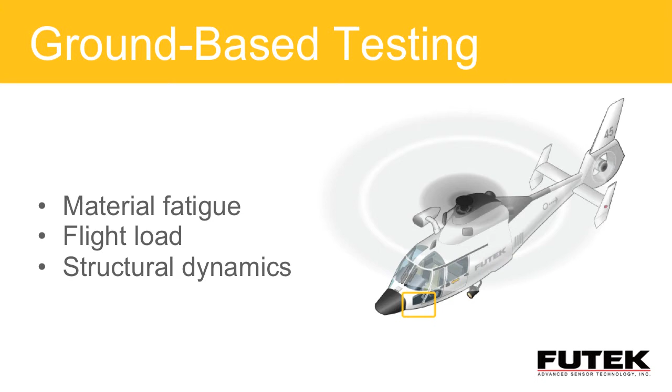These are typical of what I refer to as ground-based testing, and many of you out there probably are already involved in that. Component testing is a big one for aircraft hydraulics and other components used on the vehicles.

For both the test and measurement ground-based testing environment and the flight qualified environment, there are some significant aspects that factor in. Reliability is extremely important for any of these tests. Usually it's a significantly long test with tremendous expense associated with data collection, so high reliability is extremely important.

Endurance at the same time. We've got to have sensors that are going to continue to work over possibly millions and millions of cycles, and so we also focus on high endurance for any of our sensors associated with aerospace testing.

Multiple bridges, that's something we're involved with on a regular basis. For most of the aerospace applications, we are going to use a bridge for control and a bridge for measurement. That's something unique to aerospace, but we're aware of that, and we offer the capability for most of our sensors to be built with dual bridge capabilities for that control measurement requirement.

And then last but not least, of course, great performance. That's the other thing that's unique to aerospace. When you look at the breakdown of specifications, in the commercial world, we'll talk about accuracy and the components of accuracy being nonlinearity, hysteresis, repeatability. And then we handle the temperature errors as a separate entity.

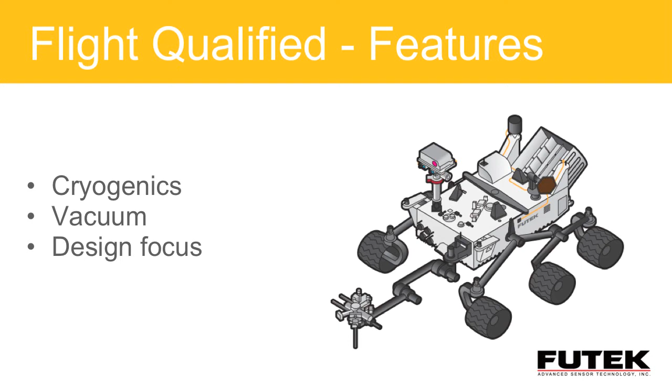What you're looking at here is one of our more exciting projects in the last few years, the Mars Rover. We've got a multi-component solution on the current rover looking at both force and torque in the sampling process that's used. As you can imagine, it's a very extreme environment, and we were very successful at providing a viable solution with a very intimate partnership with the end user.

Back to multiple bridges - in many cases we're dealing with a bridge for control and a bridge for measurement, so we try to maintain that capability across the product line. There are trade-offs between size and multi-bridge. In many cases you have to get very creative with spacing to accommodate the additional strain gauges we'll use to do that.

Vibration, fatigue, and overload - again, environmental considerations we have to look at. In many flight qualified sensors we're going to see extreme vibration environments, extreme cycles, possible overloads. For overload capability, because we use EDM, we're able to offer that capability, which a lot of manufacturers don't have. As far as vibration, we have a number of things we can do - additional coatings, how we wire internally to secure our wires and strain gauges - to accommodate those high vibration applications.

So in making an assessment for a potential supplier for a flight qualified solution, it's very important to find out what kind of history they have. Have they done other projects similar to yours? Do they have the expertise to address issues of cryogenics, high shock, high vibration, multiple bridges, and those kinds of things? We've got a list of references and programs we can bring to the table.

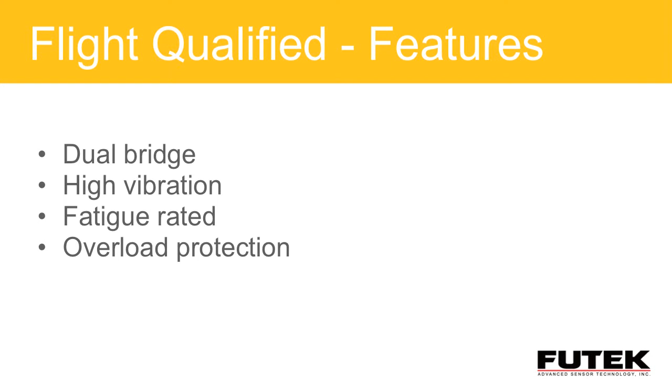And show our client or a prospective client the programs we've been involved with - the clientele, be it NASA, Raytheon, Lockheed, that we have partnered up with their technical team. So we have quite an extensive legacy in providing custom, complex solutions to address these aerospace applications.

As we begin our discussion on products and applications, I wanted to take a moment to introduce three flagship items that are only a small sample of our overall product line: the LTH through-hole series, which has been very instrumental as a base platform for many aerospace applications; the LCM, the rod end series, very common for structural testing environments; and the LAU family, commonly used for pedal force measurement in both commercial and aerospace applications.

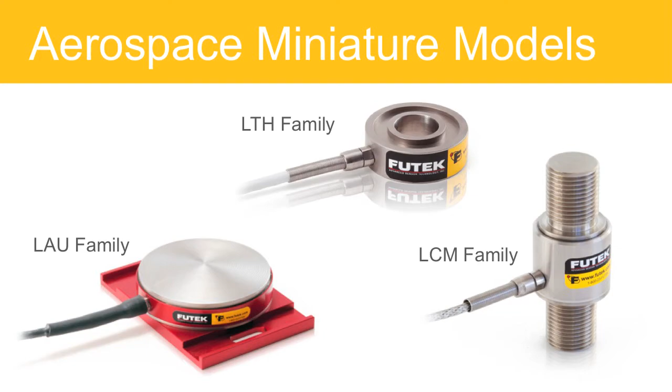Now that we've covered the credential aspects of vendor selection, and talked about the importance of having that technical capability with your supplier to provide the right solutions, I'd like to get into more of the fun stuff, which is some of the applications we've addressed over the years.

Just a couple of comments before we get started - the information presented here is generic in nature, and that's by design. A lot of these applications we're very limited on what we're allowed to discuss or present, so we've had to sanitize some of the information to protect our client. These are applications where we've provided successful solutions in the past.

Something that's extremely important, and we stress with every new application, is to provide as much information to your potential supplier as you can. That allows us to get right into a correct design path without having to do any rework at the design level. Most of the time, a non-disclosure will be put in place that protects both of us, and for any complex effort that has a proprietary feel to it, an NDA allows both of us to share information back and forth and keeps everybody's information safe.

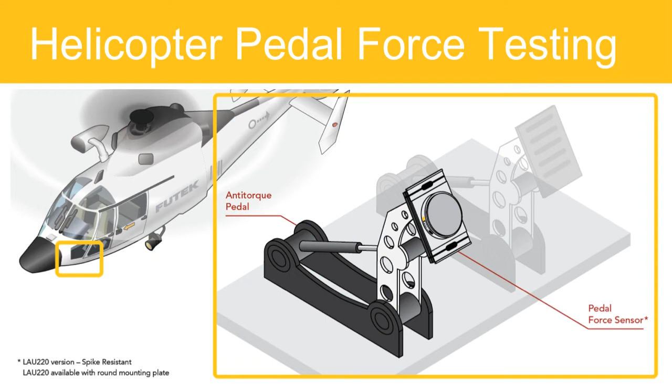If we look at the next slide, the helicopter pedal force testing, what we have is a very low profile device that gets attached to that pedal. This design was specifically targeted for these types of applications. It's got a very high spike resistance capability, and as mentioned, it's low profile, keeping things as realistic as possible for the pilot. It also has a nice slip resistant surface, extremely important to maintain control of the aircraft, and we offer a broad range of capacities from 50 pounds to 300 pounds.

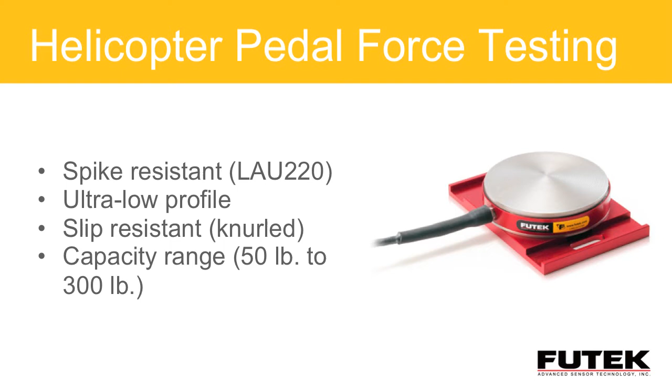Again, this is a good example of something that starts out as a standard product with a nice niche in the commercial world, but take that standard product, and with some design effort by our team in conjunction with the user's design team, possibly extending temperature applications, higher vibration capabilities, and so forth, we can build off that standard platform and come up with a solution that meets aerospace specifications.

In our next application, which we're going to stay with the helicopter for a moment, we've got the helicopter joystick. I think as most of us know, the helicopter is probably one of the more complex devices to fly, at least talking to people who I know that fly for a living. Apparently it is one of the more difficult challenges.

When you look at the control for the joystick, knowing the forces involved, this could be a ground-based solution for new product development, possibly in a simulator, or for flight test. We've got a great solution here with our joystick sensor, the MAU300. One objective here is to provide an XY force measurement, but we have to do that without modifying the environment too much, while still providing good, reliable data for the X and Y movement or control we're measuring. So in this case, we've got a nice solution.

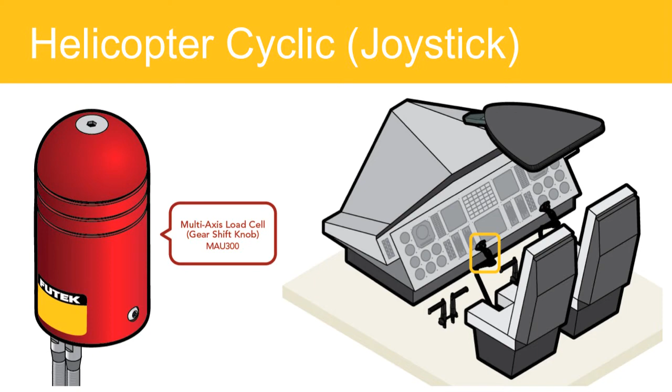If we go to our next slide where we actually feature the sensor, we've got a dual component design, and that's another thing FUTEK is very good at, multi-component solutions. If you look on our website, you'll see a category dedicated just to multi-component sensors. Here again is a solution that could be leveraged off a standard product. By the time you add modifications for fit, possibly mil standard considerations and so forth, we have a nice ideal solution for aerospace. We offer an ergonomic cover with non-slip notches for human interface.

And again, we've got to keep the package as small as possible so that we don't disrupt that environment and try to maintain the feel that the pilot is used to having in a non-equipped or non-measured situation. The miniature aspect of something like this is extremely important.

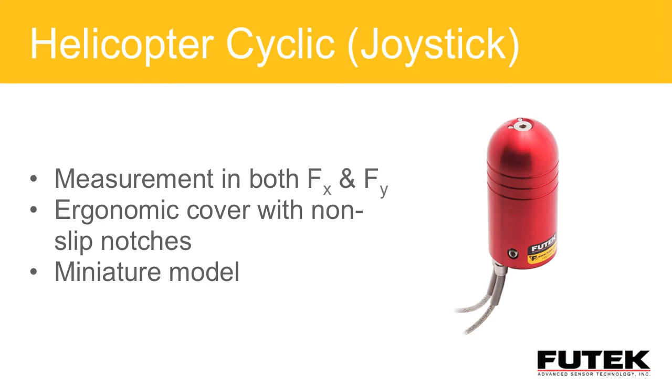For anything that involves the human interface, whether it's the pedal measurement we talked about previously, or in this case the joystick measurement, it's important that we keep the environment as close to the original environment so the pilot has the same comfort level. So we have to take those things into consideration. In this case, you're looking at a relatively compact solution that is multi-component to give us that XY measurement.

All right, let's leave our atmosphere for a few minutes and talk about something I find extremely exciting: the Mars Rover Curiosity. As I mentioned earlier, we had this tremendous opportunity to work with NASA on this project, and if anything exemplifies what we've been talking about as far as credentials, proprietary issues, and working together—our design team with their design team—the Curiosity probably is the best example of that.

They were looking for a supplier that could provide a multi-component solution. Looking at some of the key aspects of what they needed, obviously the environment is extremely difficult, so cryogenics factored in. We had to have a device that would withstand the Martian environment. What they were looking for was a load cell component of this device for drill head supervision and precision measurement as they would drill into the Martian surface. There were some key objectives to this.

One was to prevent excessive wear and tear on the drill. Obviously, in this situation, servicing and supporting is out of the question. They had to have something with a high natural frequency so they would get the proper response. And of course, lightweight factors in, as we all know—payload and getting these things out of our atmosphere and away from our Mother Earth is extremely costly, and it's all weight driven.

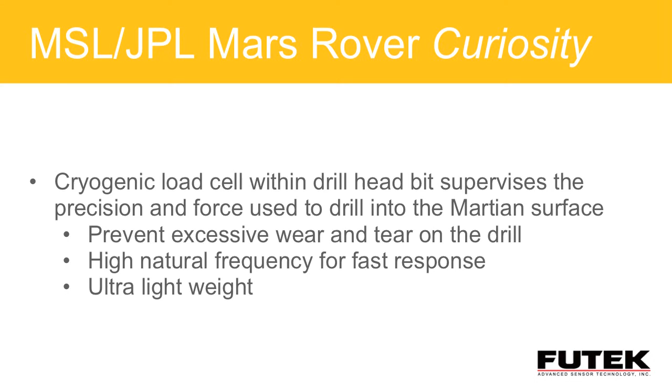Just to summarize what was involved in this: we had cryogenics, as I mentioned, and of course you're also dealing with vacuum, which is important when it comes to the outgassing issue we talked about previously. Multi-component, in the most generic application in a lab, has its own challenges, and then we throw in these other aspects of cryogenics and vacuum—it gets even more challenging. So the sensor was responsible for the rover's drilling arm, for the robotic maneuvering as it was retrieving samples and doing the analysis.

We had to design for a relatively small size, as you can well imagine, getting into some very limited envelopes and spaces. Again, working range, load, size, and weight were all critical for this application. So I think this represents probably the best of all our applications, covering our design effort, our credentials, and things like that. We've been very excited about this program, and if you've been on our website, you'll see that we've been very promotional when it comes to the Curiosity.

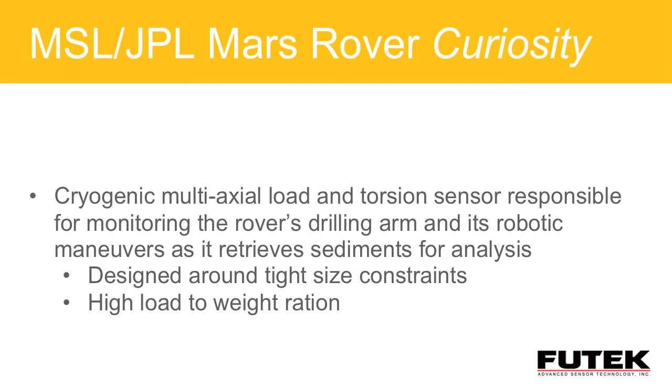Okay, well, as exciting as Mars is, let's return back to Earth for a minute and take a look at some other applications we've been involved with over the years. Again, this is another good example of a standard product that has been modified and built specifically for military and/or aerospace applications. We have our seatbelt load cell, which is intended for strap testing. In this case, we're looking at parachute testing, and of course the most precious cargo there is are human beings.

There's a lot of aspects that affect the measurement and making sure we do it correctly. So when we get involved with an application like this, we're going to request that the user send us their material so we can actually test in our lab the exact material involved in this application, because the variance in material type, thickness, and width can all affect that load application. So it's important that we calibrate accordingly. These products involve not only human beings but could also involve strap testing for cargo and things of that nature.

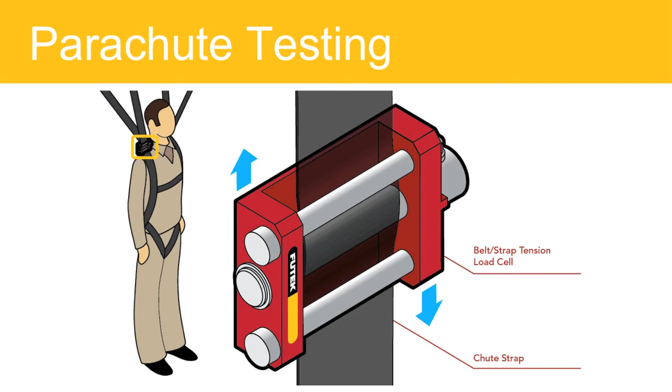Taking a look at our little sensor, some of the key aspects—a lot of this evolves from working with the client—we have aerospace grade material that we use for these applications or for this particular product. Once again, lightweight is a strong consideration because we're dealing with applications where weight factors into almost everything, and of course small size, compact design, is very critical for these types of applications.

Some of the key aspects to this particular product and others we've mentioned: first, we have a standard product used in general industry for seatbelt testing and similar applications, so we already have a basis for solving the problem. We take this standard product and customize it to adapt to an aerospace application, in this case parachute testing. Working closely with the client, we tailor fit this device specifically for their application, using our standard product platform and years of aerospace experience to come up with the optimum solution.

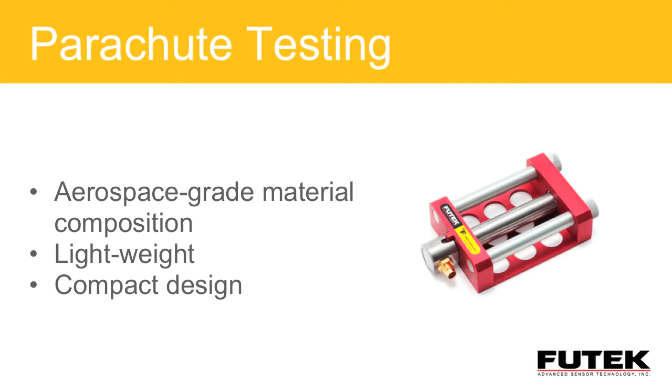Moving on to our next application. I want to emphasize that our objective in reviewing these applications is to give you exposure to the work we've performed, showing we have a proven track record of aerospace type applications and have worked closely with those entities to provide great solutions. With the retirement of the space shuttle, we move on to the Orion project, and we've had some involvement with the Orion payload testing.

When you look at this slide, we want to emphasize that there are a number of different ways to get to the right answer as far as product selection. When the program started, they were looking at possibly the LCM rod end style, but were also considering the donut style, or the LTH series. Both products are perfectly good as far as capability in making the measurement. A lot of it had to do with interface or fixturing, as to how you interface the sensor into the capsule and the chute mechanisms.

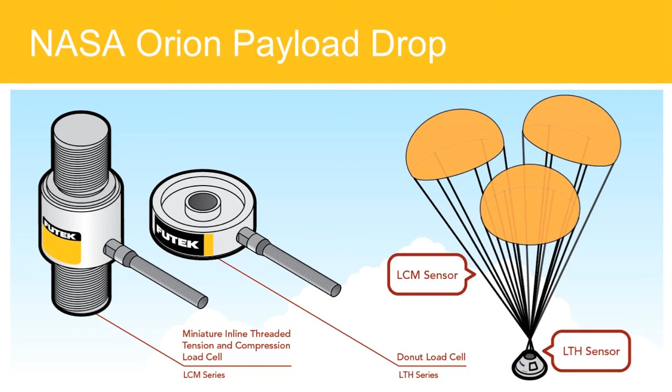With a rod end, you have to take into account extraneous forces. Being a longer type load cell, it's more susceptible to bending and moments. You don't have those issues with the donut load cell, but with a donut load cell you have to be careful, since you're typically loading in a compression mode and your surfaces have to be nice, flat, and parallel. We had a test here they wanted to perform during design and development for the chutes, and we finally concluded that the LTH series was going to be the best solution for this application. Size was critical, getting it into a very confined space while making a very good measurement.

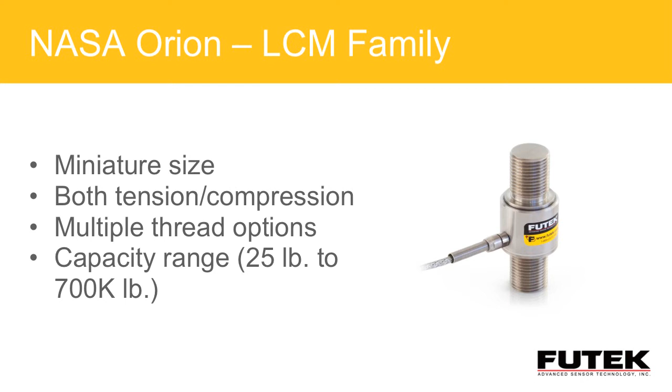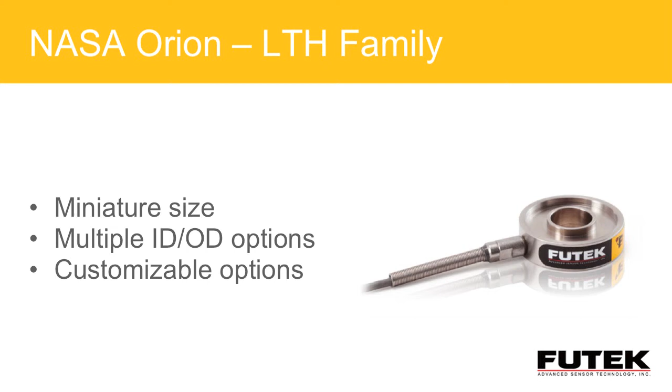If I compare that to my LTH family, I've got a much smaller package to work with. The nice thing about the donut is you have a lot of flexibility in OD-ID configurations. There's a relationship between working range, performance specifications, and that OD-ID height combination, so within the realm of the physics that drives that design we do have a lot of flexibility, though we still have to maintain a certain relationship between OD, ID, and height to maintain certain linearity capabilities. We take this platform, then account for extreme temperatures, possibly vacuum considerations, and build, working with their team, a custom solution that fits their needs.

I want to wrap up the parachute deployment discussion with something that's probably the most important aspect of any of this: many of these applications for parachute development and deployment testing are safety related. When you look at the assets involved for our military, there's nothing more important than the safety of the crew. So if we recap from the beginning, our standards, performance requirements, and all the design criteria that go into these solutions for these types of tests, when safety factors in, it becomes so important to make sure you do it right and give the end user something they can count on when you're putting people's lives into the equation.

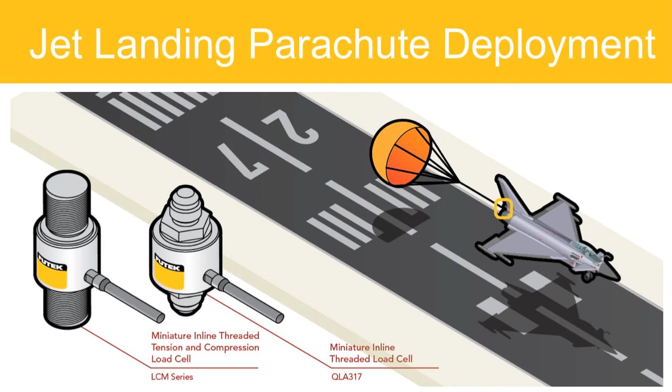Moving on from parachute deployment testing, I'd like to take us through some controls aspects of the aircraft itself. One of the more common applications, if we look at our aircraft jet yoke control, is just that, the classic control in the cockpit. And when you look at that, obviously we're back to a multi-component solution where we're looking at the force of Z and the moment about Z.

The other thing that factors into this application, just like the joystick, is in simulation as well as actual aircraft, there's a very rigid criteria that you can't change the environment. So once again, we're looking at product requirement.

In this case, we're talking about our MBA, where we have a very limited size envelope that's available to us. We have high performance to consider. Environmentally, we're not concerned about cryogenics or any of those kind of things, but performance is going to be key. So small size and performance are going to be a driver here.

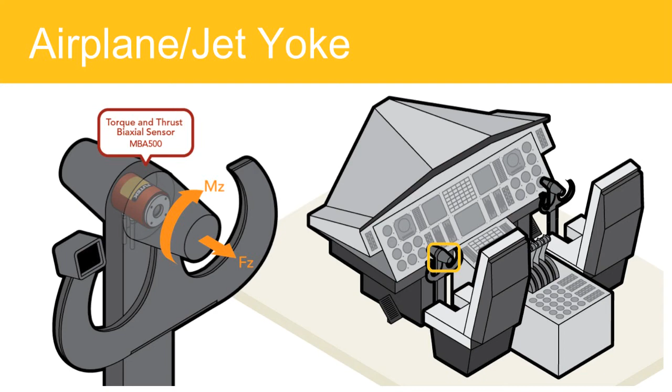So once again, if we move to the next slide where we talk about the product itself, we have a standard product. If you look on our website, you'll find this product that we offer and stock in a generic format. Some of the key aspects for this sensor, as I mentioned, are biaxial and very small, which is going to be a requirement for this application.

We offer ranges in the force axes from 50 pounds to 500 pounds, torque from 50 inch-pounds to 500 inch-pounds. But then we take the base design, and usually in something like this, as a classic example for aerospace application, it's going to be performance and reliability. This thing has to deliver performance capabilities consistently, and has to do it for very long periods of time.

And so now we take again our design team, plug them in with their design team, and come up with a solution that meets or exceeds the customer's expectation.

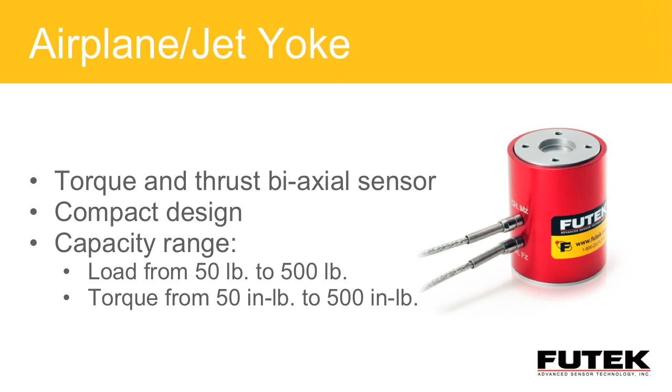As we move into our last application, I'm going to have to take you back up into space, which is certainly probably our more glamorous environment of all these applications we've discussed today. But wanted to just talk a little bit here about the National Polar-orbiting Partnership.

Now, this is a satellite that's involved in weather applications. In fact, this was the satellite, my understanding, that gave us the images during Hurricane Sandy last year that devastated the East Coast.

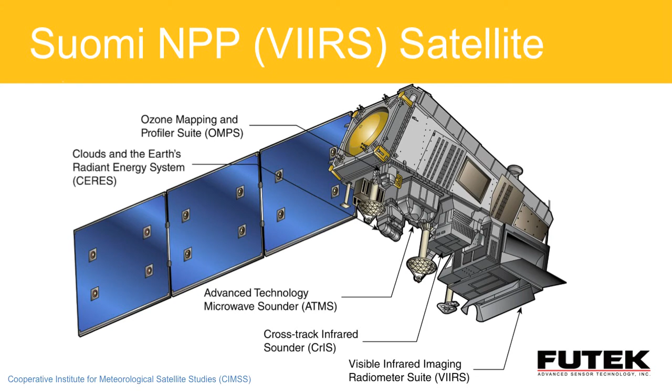But basically, we do want to take this opportunity to thank the Cooperative Institute for Meteorological Satellite Studies for providing these particular images. Without them, we would not have these, so we're very grateful for their cooperation. Basically what we have is an instrument here known as a Visible Infrared Imaging Radiometer Suite.

Looking at the next slide for the satellite, basically what was involved here is FUTEK had to design 2 cryogenic load cells to operate down to minus 300 degrees.

In the setup and installation of the cryoradiator, there were some problems in previous systems where the force being applied during the setup was incorrect. So the FUTEK solution provided Raytheon with a method to do proper installation, making certain that the installation adjustments and setup were done properly, and the load cells actually stay with the device and are in orbit as we speak.

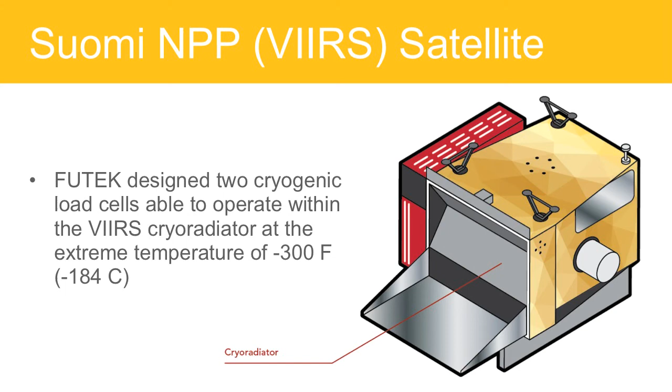So if we look at the last slide associated with this particular application, what were some of the criteria and demands that we had to look at in order to provide a solution for Raytheon? Well, first of all, it was a custom solution, so we didn't have the platform necessarily like we had in some of the applications we looked at previously.

We had to have dual bridge, and that was for redundancy considerations. Obviously cryogenic, we're working in space, so we're dealing with those temperature extremes again. Shock and vibration, most of that deals with the launch. We've got to be able to survive the launch and continue to work once we're up in space.

And then being in space, we're vacuum rated again. In so many vacuum rated applications, whether it's in a chamber here on Earth or in a space rated situation, outgassing again is a very key consideration. So once again, our team in close proximity to their team, discussing all the details associated with this, very important.

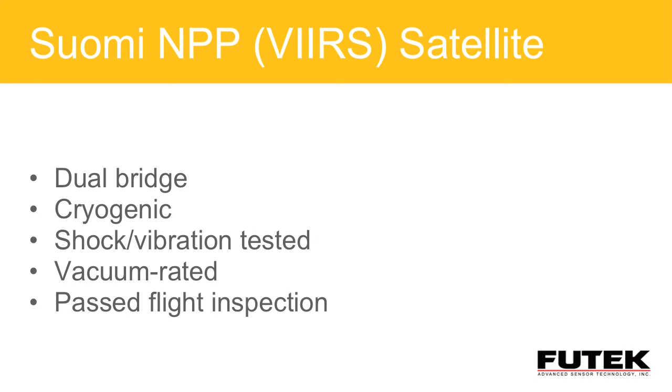And then of course we have to pass flight inspection. So it's probably one of the better examples of where possibly we didn't have a particular mil-spec qualified device, but we looked at what specs were required, we designed and built to those requirements, and then the end user in this case would then do qualifications on the entire system, of which we were a component.

As we conclude our applications, I'd like to just kind of do a summary and take a look at what I believe are the key takeaways for this discussion today.

And that is when you're doing your vendor assessment, you're choosing a vendor for this important project that has significant importance, what should we be looking at?

Well, just to summarize what we've talked about, you need to find somebody who's got extensive experience and a proven track record in both test and measurement ground testing, as well as flight qualified applications. Looking at FUTEK, we've got 25 years of history, and we've only covered a few applications. We've got the application history and the engineering talent to provide those kinds of things.

The engineering talent is extremely important. You need to have a team that you work with, that you can trust, that by looking at their credentials, by talking to them ahead of time about what programs they've been involved in, you develop a confidence level that these guys are the right team for your program.

I think looking at standard product offering is very important. When you look at our products, as you saw today, many of those are the base platform for the custom solution that we end up with, and that's very important. A very broad product offering is critical. In our case, besides the multitude of load cell form factors that we deal with, we're also multi-component, and I think that's an important reference for evaluation of your potential supplier.